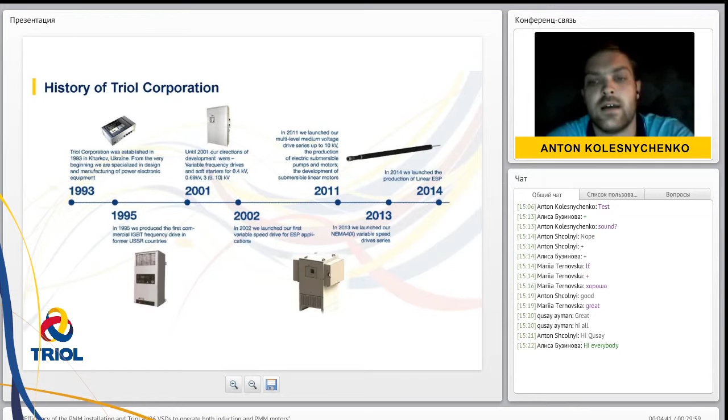Currently, Triol Corporation has two different branches of activity. One is ESP application, or oil production sector, for which we provide equipment such as VSDs, soft starters, switchboards, downhole sensor systems, and automatic control dispatching systems. The other is industrial application, for which we offer medium and low voltage variable frequency drives and medium voltage soft starters.

Right now Triol Corporation employs about 700 people, of which about 100 are design engineers and basically about the same amount are system programmers. We have 3 manufacturing facilities - 2 based in Ukraine, 1 in Russia.

Right now we are working all over the world with world-known customers who are service companies or oil production companies. And we have the full production cycle, which starts from electronic units and ends with metalworking.

Regarding PMM technology, everybody knows that PMM technology is becoming more and more popular all over the world. In the US it's just entering the market. In some North Africa regions it's already in use. Middle East is also starting to use PMM technology. Latin America too - I mean, everywhere.

The main reason for that is the power factor, performance curve, and efficiency curve of the PMM installation. As you can see on the slide, the PMM power factor is about 96% all the time during operation, whereas the simple induction motor, which is more common, is much less. The efficiency for the PMM technology is 84-93% for the installation; for the induction motor it's 74-86%.

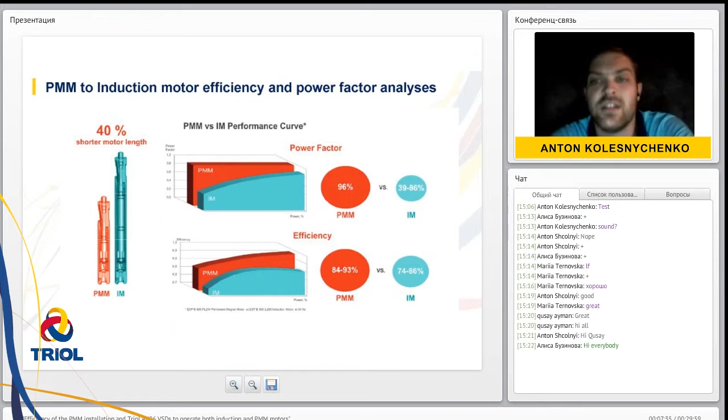On the next slide, I was trying to show the main problems of using PMM technology from the customer side - from the final customer, the oil production company, whatever. So the PMM system price levels down its own efficiency. Why? Because...

Several years ago, probably the main question for oil production companies was just efficiency. The oil price was high, and any installation paid for itself in a short period of time, in several months. Right now, this higher efficiency of the PMM installation must be justified by its price, because it's leveled down compared to the system price versus efficiency.

And all the manufacturers of the PMM motors I told you about basically offer the whole installation as a kit, and their problem right now is the high prices at the market. That's why the final users are not ready to immediately change their induction system to PMM.

And what we can do, and everybody could do: the PMM installation could be combined from different components. That's the opportunity for us, for the service company, for the oil production company, to lower the production cost and lower the PMM installation cost. So that will make the real efficiency of the whole installation.

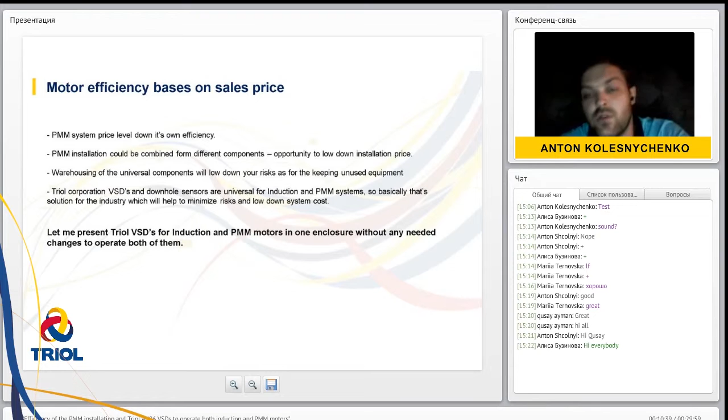And later, let me present on the next slides what Triol could offer as a good solution for PMM technology, which at the same time keeps its efficiency from both sides, the price side and the real efficiency side, and what could be interesting for the final customer, for warehousing, for use with different types of motors. Basically you will need to buy only the PMM motor from any supplier, and you will know that you have a universal VSD at your warehouse. So let's jump to the actual VSD slide.

The Triol VSD, let me step back. It's already a well-known drive all over the world. Our VSD is operating right now in Latin America, in the United States, in the Middle East, in the Asia-Pacific region, about 10,000 wells in operation in Russia, in Africa as well. The Triol VSDs are well-known, so probably you will not have any problems presenting Triol drives to the final customer. And so what do we have with the variable speed drive?

NEMA 3, NEMA 4, NEMA 4X enclosure types are possible. What is good and what is the difference? The difference will be for sure in the price level. And basically we need to know the exact customer requirements. And why do we need them? Because based on the requirements, we can do even a stainless steel VSD.

The other universal thing in our drives is the different supply voltage types. It could be 380, 480 volts, 415 for the Middle East, or for generator use. All the types, and all of this in the same VSD. So you don't need to change everything. You're just choosing the type of network in the controller settings, and that's it. No additional things or components you need to install.

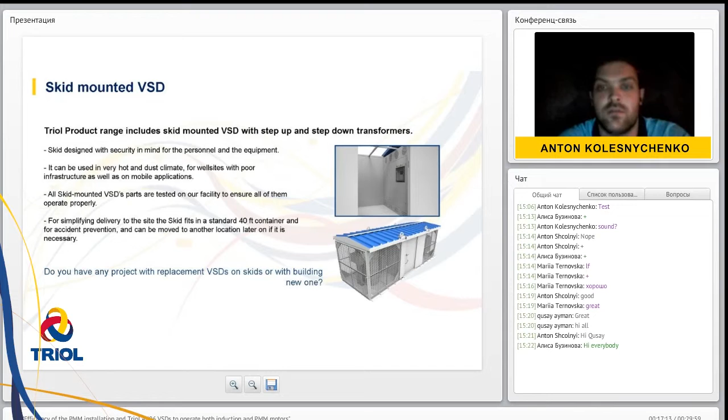With these skid-mounted VSDs, we are working in the Middle East market. Basically, what are our customers over there mentioning about the system? That it's really universal. You can transport it. You're just keeping the skids at your warehouse, and anytime, for any well with any ESP system, I mean PMM or induction motor, you're just taking it on the truck and moving to the well site, where the ESP is already worked over and in the well, and you're just connecting this skid. That's it.

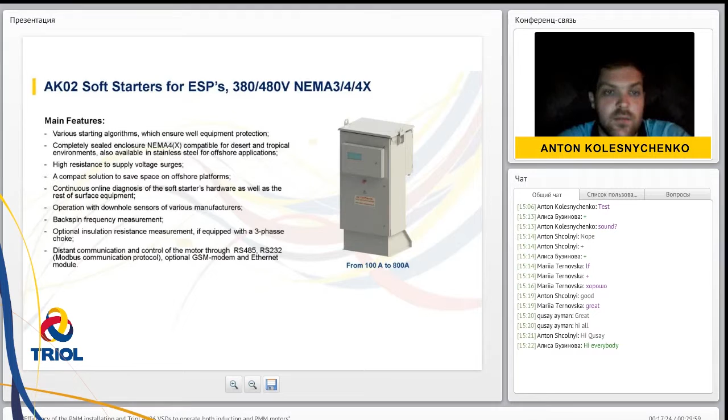Regarding the PMM, let me come back to the main AK06 series drive. As far as I know, already in the United States there are about 5 to 10 installations of PMM technology in operation, and there is pretty good feedback from the market about the PMM technology. And after my June business trip to the United States, I found that the main problem of the current PMM technology and PMM system is actually its price. And that's not the price of the motor or downhole sensors. The problem is the price of the VSD.

And Triol is, in numbers, about 30 to 40% cheaper than the PMM technology providers. Why? Because we are well experienced. We were probably one of the first companies in the market who could run the PMM technology. And basically, we are entering the PMM market right now, making the same step as the PMM motor manufacturers. And the feedback from the US market was that the only reason they are not using more of this system is the price of the installation. And the other one, but not so important, is that customers do not want to stay with unused equipment like VSDs at their warehouses.

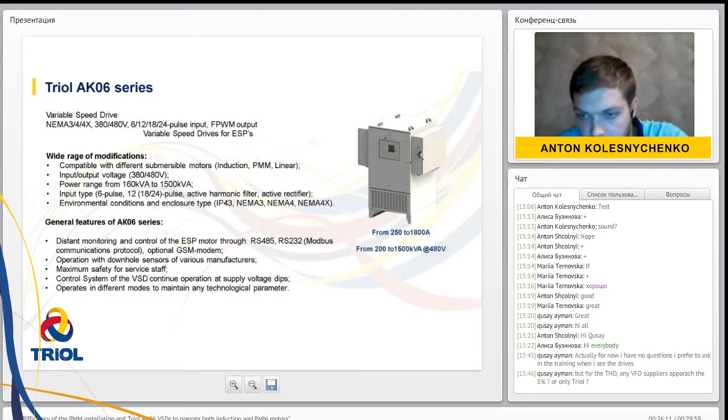Okay, Qusay. Yes. No, actually, the THD level is not only a Triol feature. Some suppliers have active filters, some have passive filters. There are some drive manufacturers in the world who can reach the IEEE 519 less than 5% THD level. But at the same time, their drives are not as universal as Triol drives. So with the drive with the active harmonic filter, giving you less than 5% THD, you are getting a universal drive, and the active harmonic filter goes as part of the drive.

And what some manufacturers do is buy the active harmonic filter or passive filter separately and connect it to other manufacturers' drives. But again, that's a question of connections, connection diagrams, and so on. And the other way we can reach it, and I don't even think somebody else could do that, is 18 pulse and 24 pulse drives. Baker Hughes is not able to produce them. Novomet is not able. Toshiba as well.